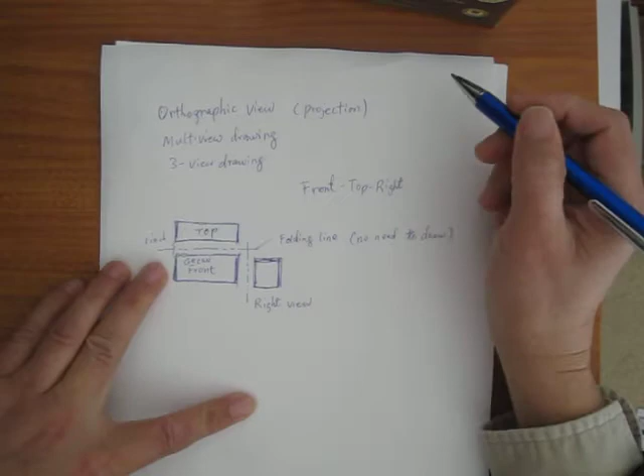Now, how much space is between the top and the front and right side view? Normally, we set it at 1 inch. 1 inch here, 1 inch here. But this 1 inch is not critical. Now, there are some other relative positions you've got to follow. Relative position means, let's say, these two lines should be on the same line. They should line up.

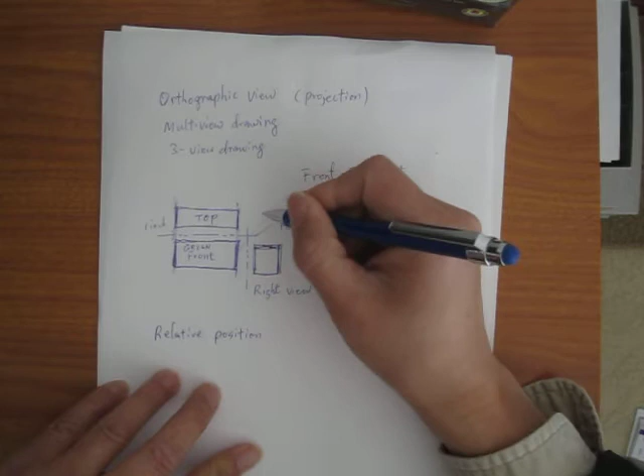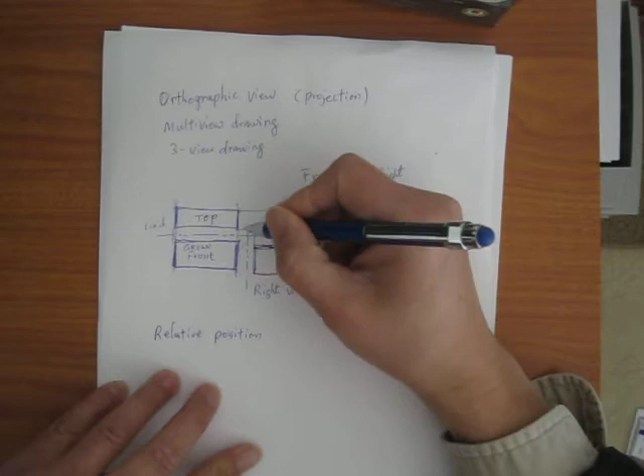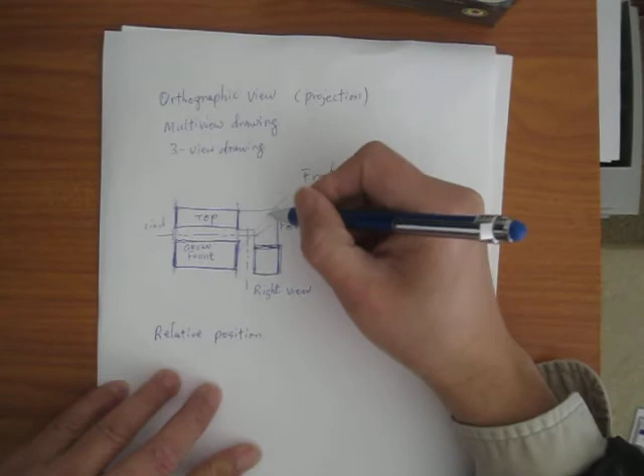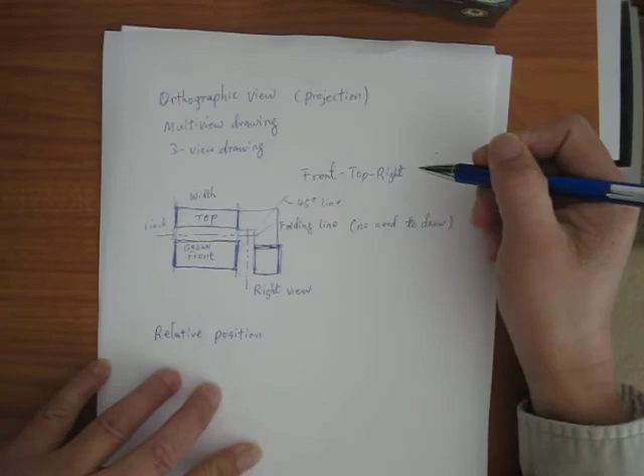Now if you have a 45-degree line here, if you draw a horizontal line and reach this, draw a vertical line, horizontal line, vertical line, they should be lined up. So these are the relative positions. This is a 45-degree line, and they should line up. So you can see this is something we call the width, and the width is going to be the same. And that's going to be the height. It should line up here. This is going to be the same height.

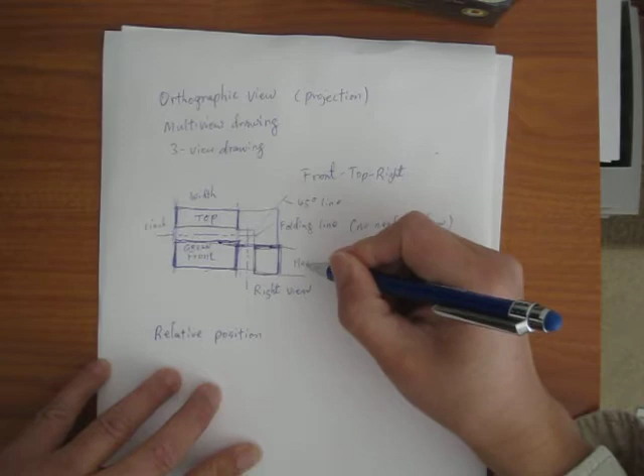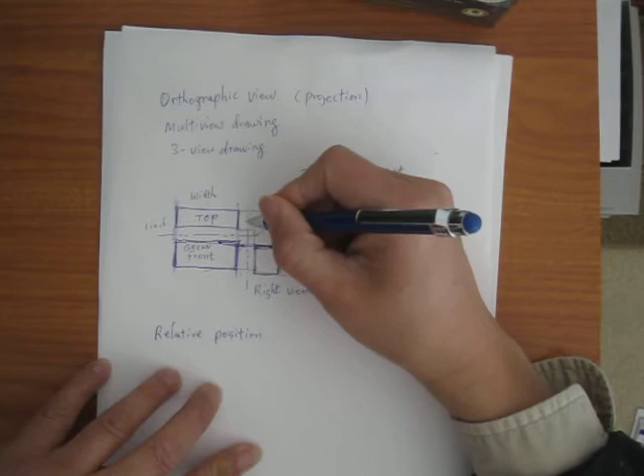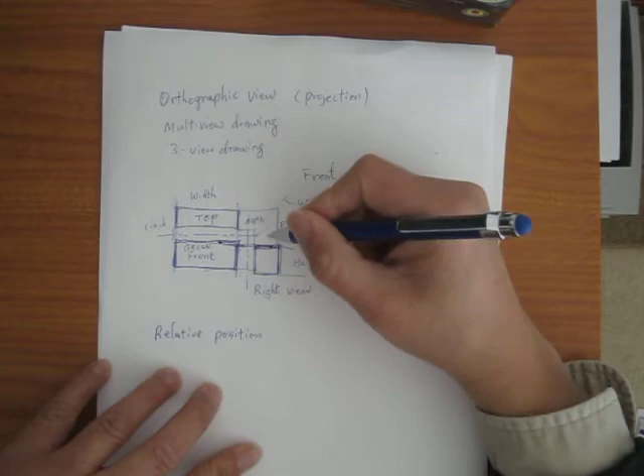Now this line here we call the depth. And if this is the depth, this is the same depth. So they should be equal. The length of the line should be equal. This is the relative position of those three views.

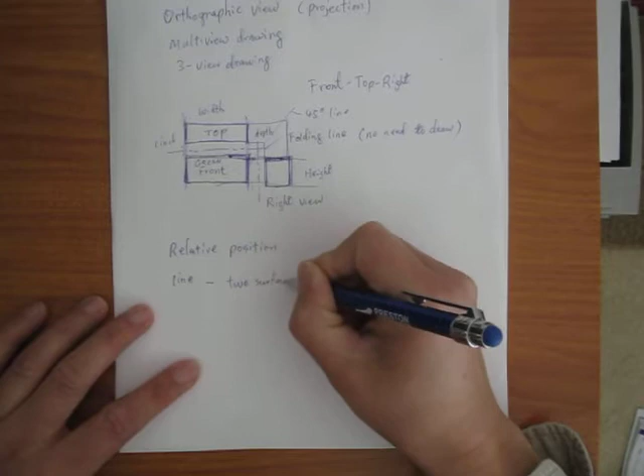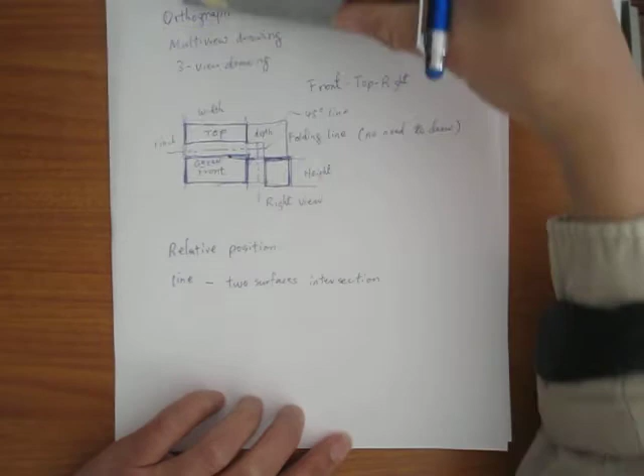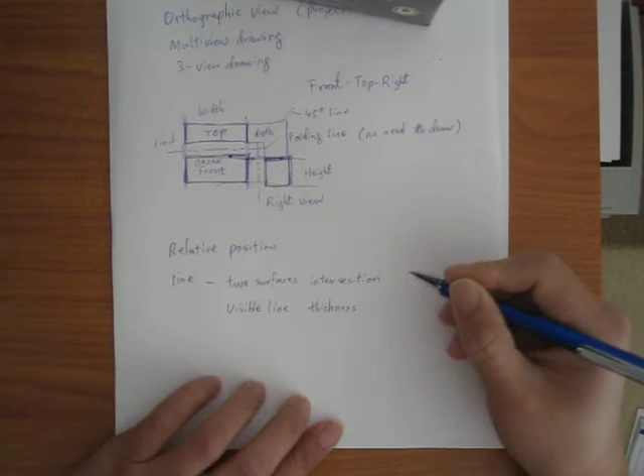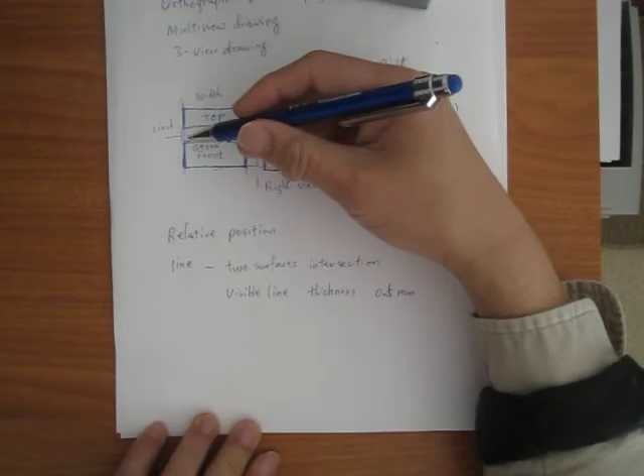Now, what is a line? A line is the intersection of two surfaces. Anything that you can see is a visible line. In the previous lectures, at the beginning of the class, we talked about the visible line and the line width, which is the thickness of the line. The line width in AutoCAD is 0.5 millimeter. So the visible line, you've got to draw it at 0.5 millimeter. Now, let's say I have a feature that is blocked by the surface; this is something we call a hidden line.

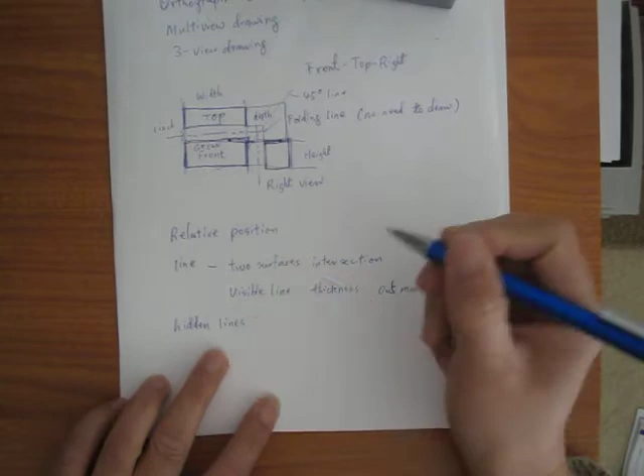Hidden lines. And the hidden lines, we know those are 0.25 millimeter thickness. So certainly, if you have an internal feature, which I don't, that's not a very good model here. But anyway, if you have an internal feature, let's say if you have a hole, and certainly from this side you can't see it, then you have to use a hidden line to draw that.

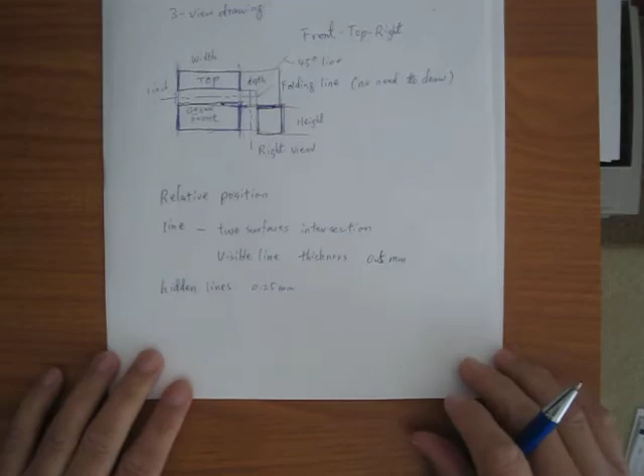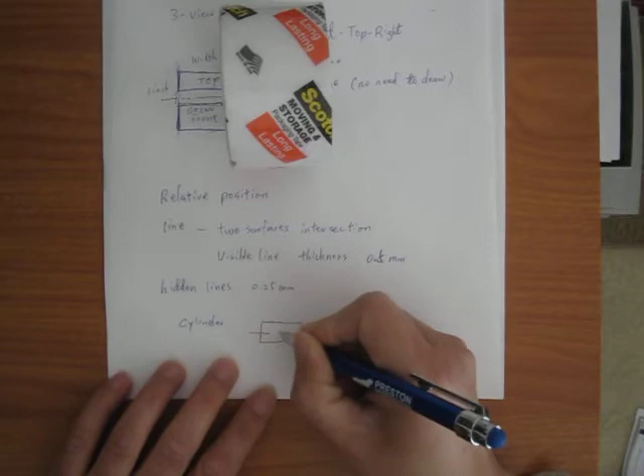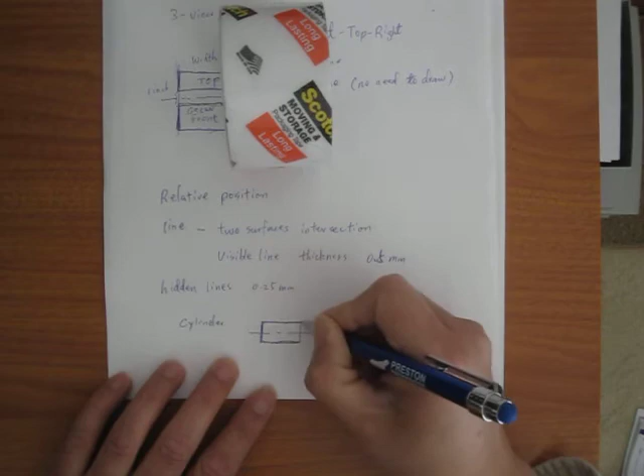Now, when we talk about a hole, how about a cylinder? How do you draw it? A cylinder is drawn in this way here. That's going to be a cylinder. And a cylinder should have a center line here. I'm going to draw it a little bit darker here. So this is going to be the center line, and that's going to be a cylinder.

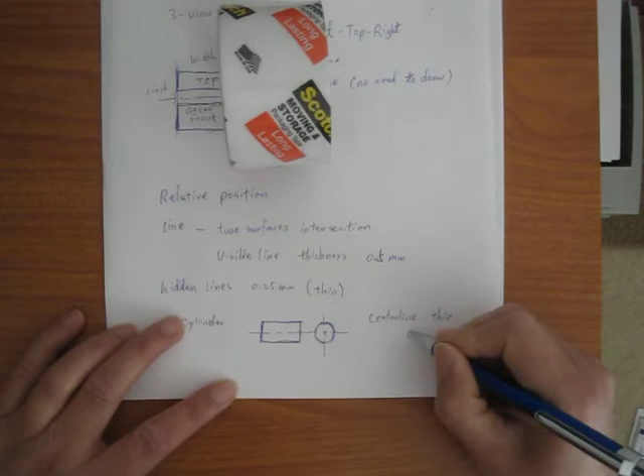So for a cylinder, you're going to have a center line. You're going to have a certain edge over there, and then just a circle here. Then you have to have a center line. Center lines are also thin lines, 0.25 millimeter. Okay, now that's a center line here.

Now let's say I draw my box here that has a hole going through it, and that's going to be your top view. They should line up, and certainly this hole is going to be a cylinder, and then you need to draw hidden lines. Remember, hidden lines are dashed lines, and you need to have center lines here. Okay, so that's going to be a cylinder here.

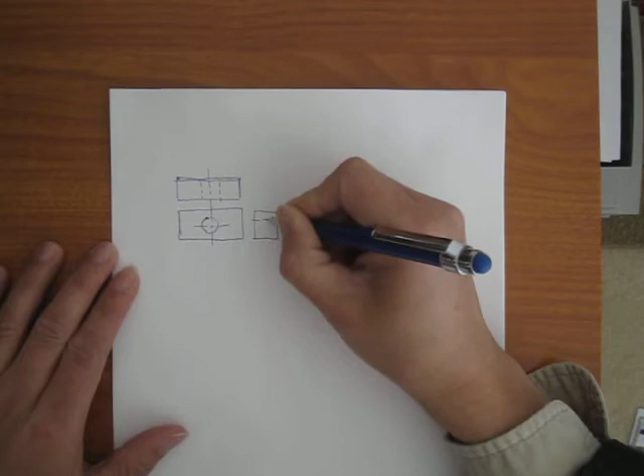And if you want to draw a right side view, that's going to be the holes here. You're going to have hidden lines here, and then you're going to have a center line. So you know that's going to be a cylinder.

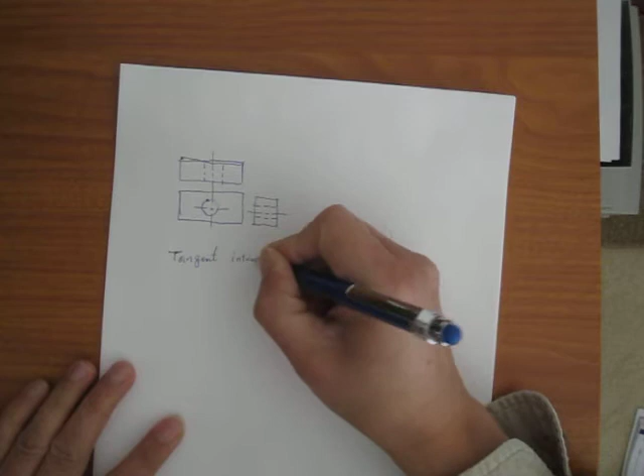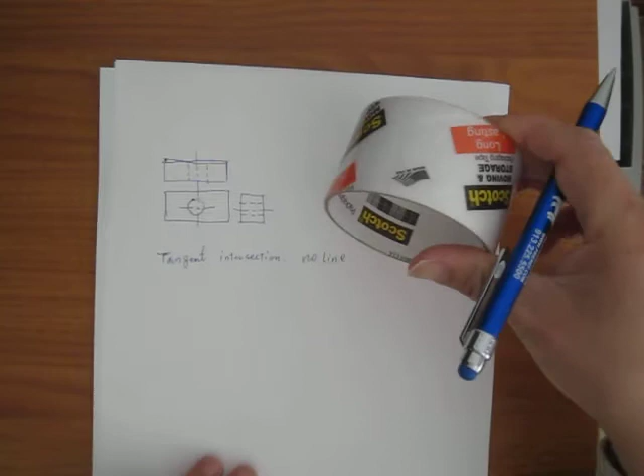Now, only in this situation where two surfaces come together, you don't need to draw a line: something called a tangent. For example, this surface here and this cylinder surface sitting on it, my sheet here is tangent to this circle. So tangent intersection, no line. Other than that, if it's not tangent, let's say it cuts through my cylinder, then you will have one or more lines like that.

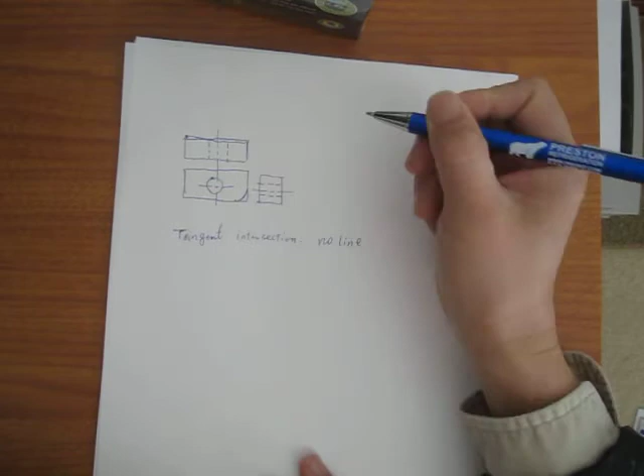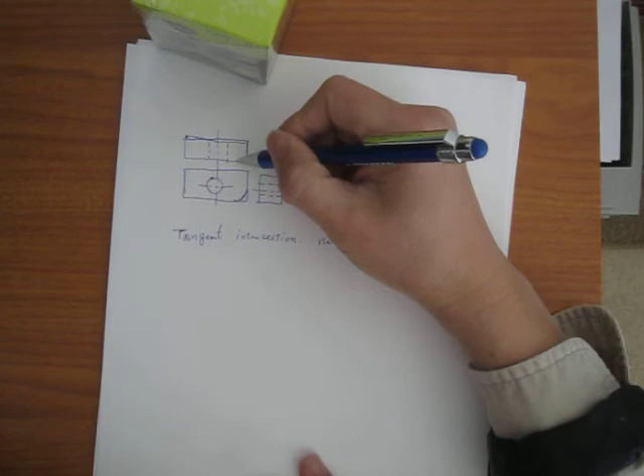So those are the three-view drawings here. Now that's a little bit tricky for a cylinder. For a cylinder, you have a complete circle. How about if my corner was cut off, rounded? If it's rounded, you will have a round here. And on top, you don't see any line because this is a tangent contact. Here you don't see any line either, and on the right view you don't see a line, because it's tangent contact.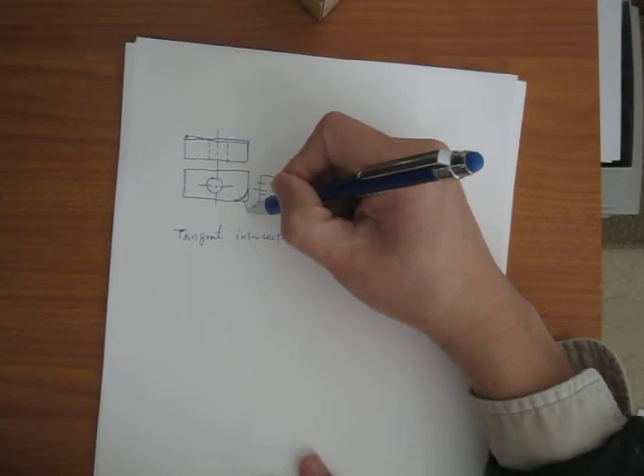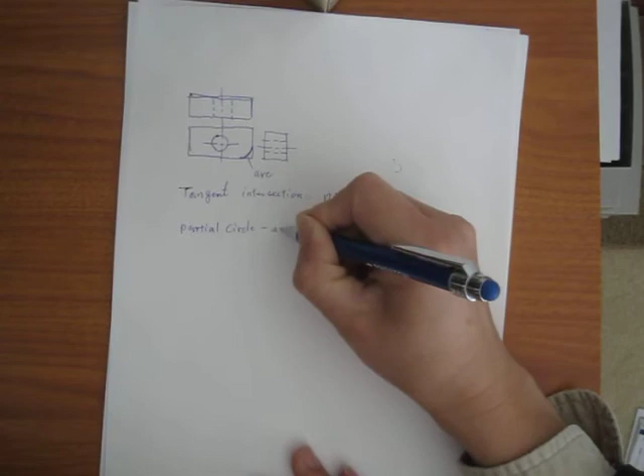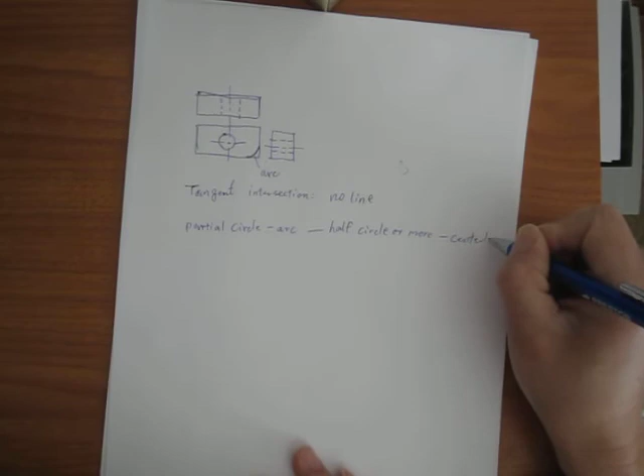Now how about this? This is something we call the arc. Do you need to have center lines for the arc? An arc is a partial circle. If the arc is half circle or more, you need to have center lines. If it's less than half, no center lines.